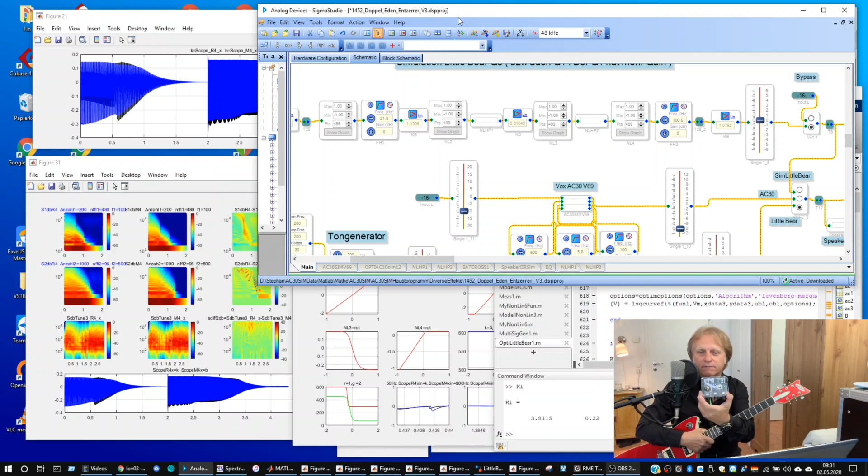This video blog is about a very new thing I've found here. This is this little box, a stomp box with a tube inside. It's called the Little Bear, and it sounds like that.

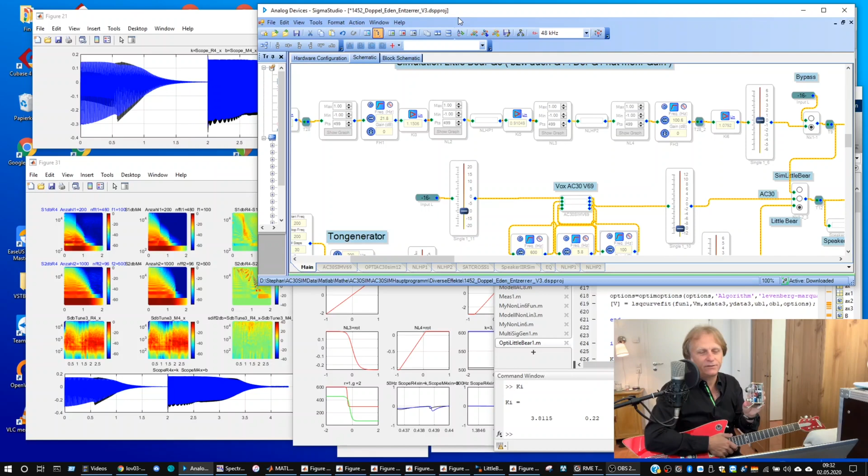My friend Joe gave me this and said, Steve, have a look at this nice little stomp box. It's got a real tube, the 12AX7 inside, and it's got some tone pots here for tone blend, gain and volume. I played that and I think it's pretty great, a dirty sounding little tube thing.

I'd like to model this in my digital DSP platform, the ADAU1452 from Analog Devices, and that was a great challenge for me to do.

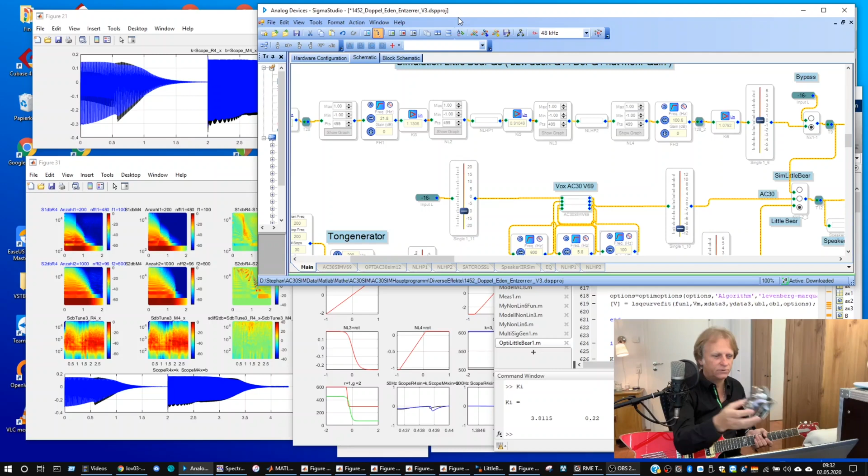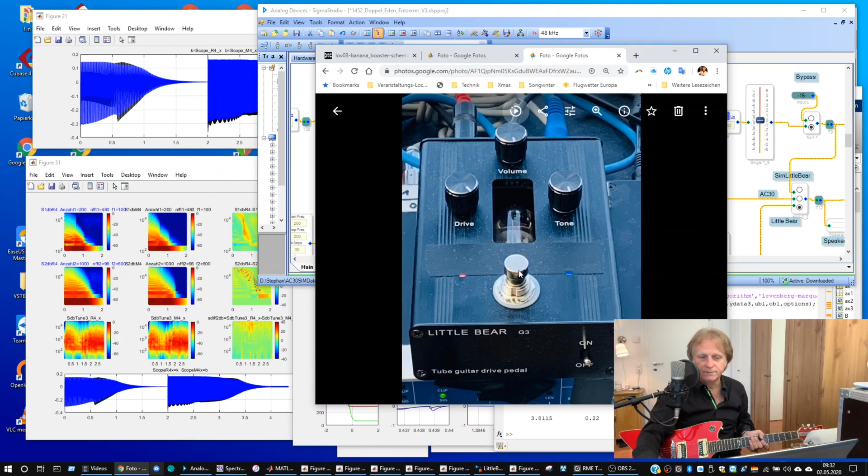I thought, well, this is a little bit humming because of the plexiglass - it's not very much shielding. So I found a device from China, this one here, Little Bear G3. It's actually the same circuit, but it's got an aluminium cabinet outside, so it's good against hum, same pots and the same tube. It's got a little less drive than the original G1, but that's okay - that was already too much.

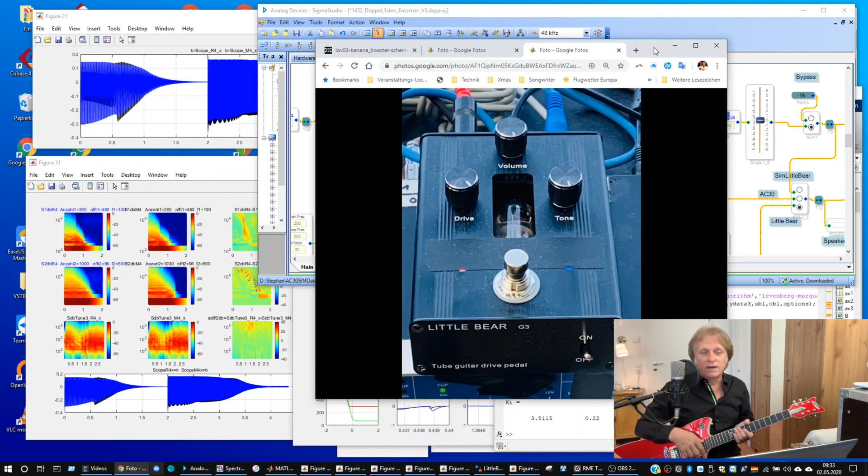I tried to contact the company to give me the schematic to have a look at it, but they didn't give me. So I had a look at the signal. Actually, I can show you the signal here, and it's pretty fuzzy. You see the edges at the negative signal side - that would just give this little fuzzy sound, a nice dirty thing.

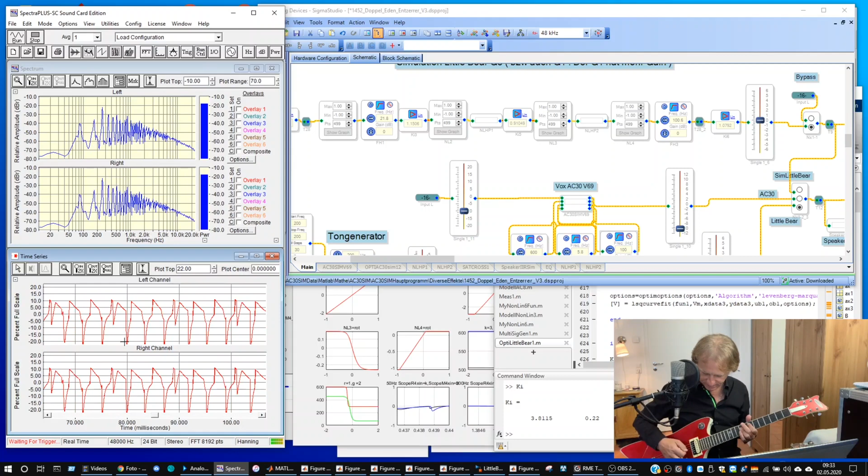It's pretty different to my AC30 simulation, which I loved all the years - a completely different sound. I can show you here. I have a simulation of my Vox AC30, and it's like that - totally different, much smoother. You see, the signal is rounded and limited on both directions, positive and negative, and that gives a very creamy sound.

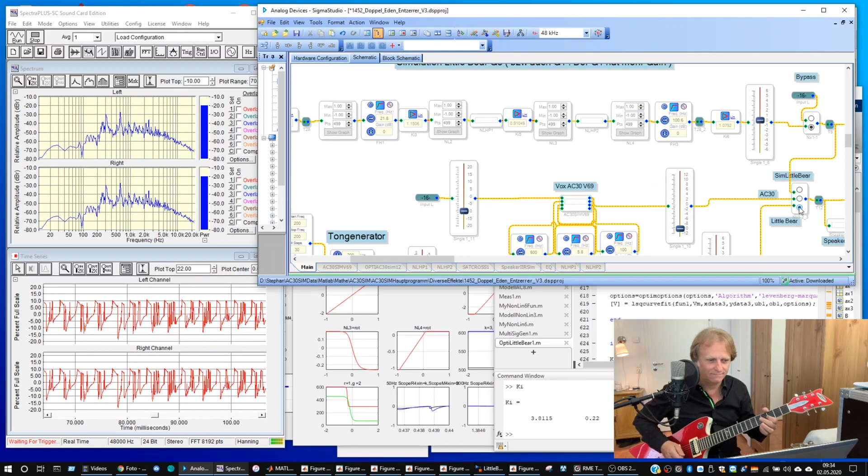Right? Creamy, soft, not too much treble, but this little beast has a little fuzziness, which is so nice. It's actually live played through the Little Bear here, physically connected to my audio unit.

I thought, what's inside? What can be there? There's this tube, the 12AX7. This usually has two stages to reach the gain. They are both connected, and there may be some high pass between input and output somewhere in between. Don't know really, but I looked at the internet and searched for some other schematics of similar stomp boxes with tubes inside.

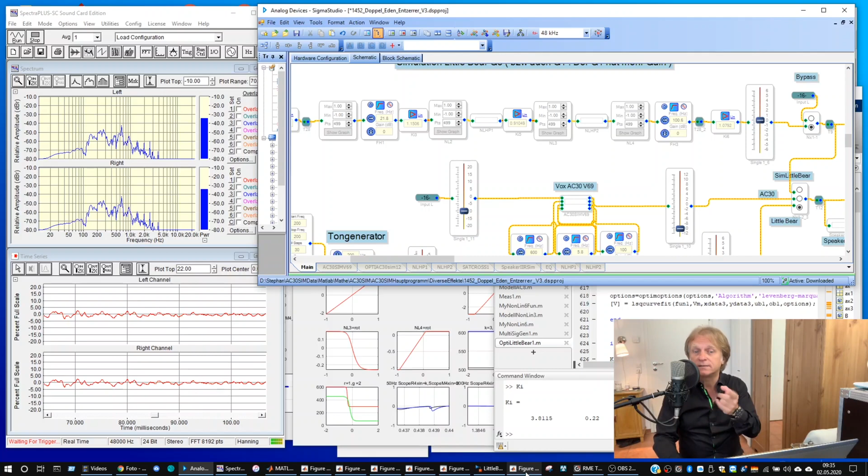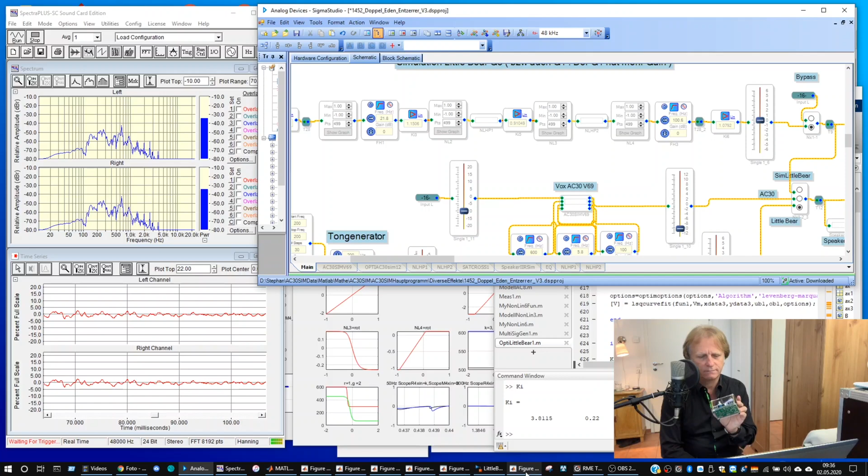Actually, it's supplied with a 9-volt DC power supply, and I thought, well, maybe they have a voltage upward regulator to reach the high voltage of 140 to 200 volts at the tube to let it work in the normal condition, but I wasn't sure. I couldn't look at this circuit so much - the printed circuit boards are very hard to determine what's inside. I couldn't see any integrated circuit there, so I thought, well, what's there?

So I was wondering why the signal is so edgy, and after researching the internet, I found a circuit here, which is a boost driving pedal with a 12AU7, which is a bit different, but similar. You see here the two stages - stage 1, stage 2, and input resistor and the resistors here. And you see this is connected to a battery, 9 volt. This is very unusual for a tube to drive.

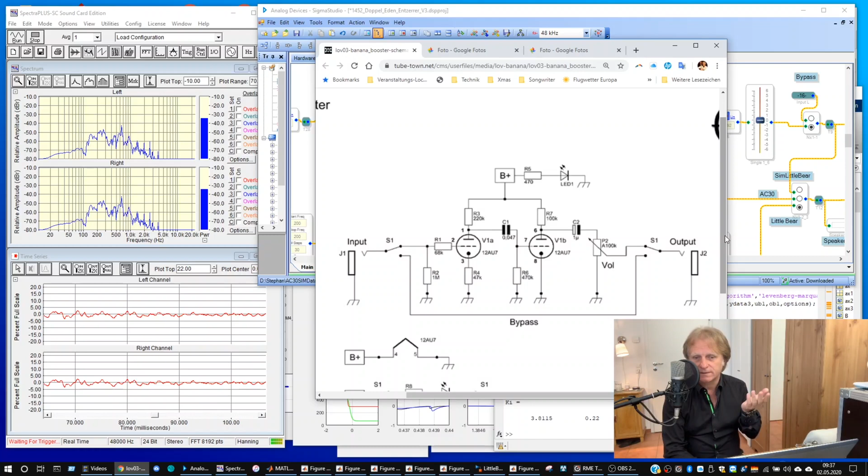And then I said to myself, well, let's start a little SPICE simulation and look how the signal and voltages are. I could see clearly that the bias point is very high, close to the 9 volts, about 7 or 8 volts. And then you see this clipping very soon at the positive side, and it's got a long way down to the negative side. You can see it in this signal here - that it's the truth.

I can show you a bit more close. This is a sine wave. See this? This is the Little Bear, and you see there's a long way down on this negative signal. If you compare it to the AC30, it's like that. You see, it's quite - there is some asymmetry inside there, but more or less symmetrical, more or less, okay?

If it's strictly symmetrical, you wouldn't have the odd and even harmonics - you would only have this and this and this and this. But you can see the Little Bear has lots of harmonics here, lots of harmonics. That's why it sounds so fuzzy. I love it. Okay, stop it here.

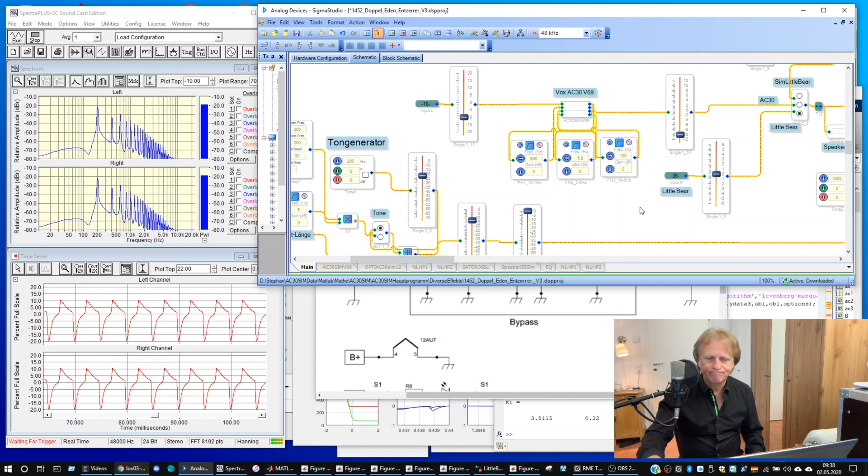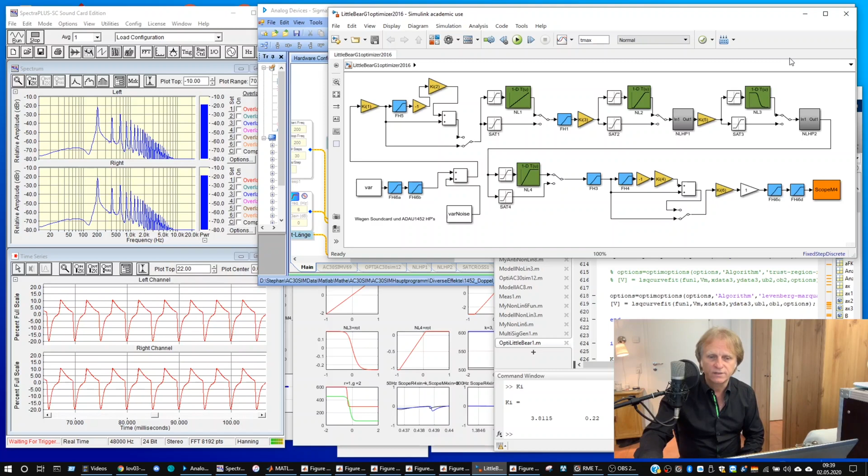That was a good starting point for me to go to Matlab, and I built up a Simulink model. So assuming that we have nonlinearities there, it's hard to decide how many, but usually 4 is enough to give the algorithm, which is the lsqcurvefit here in Matlab, which enables us to solve nonlinear curve fitting problems in a least squares sense. You have the possibility to open this help function here in Matlab.

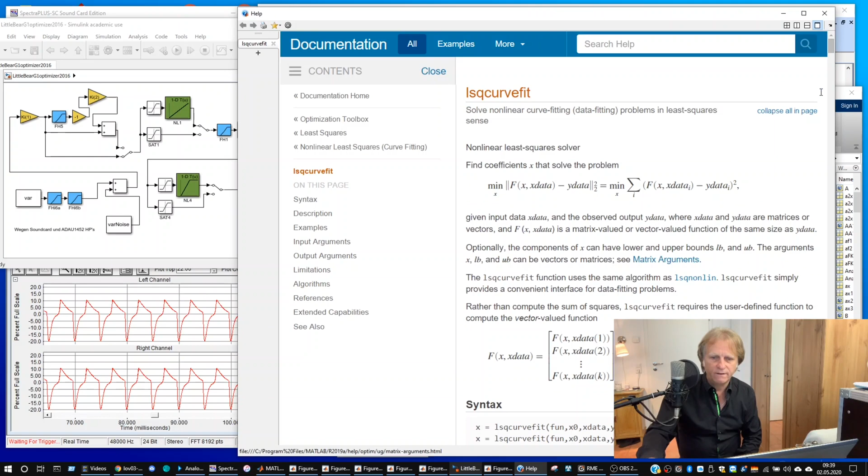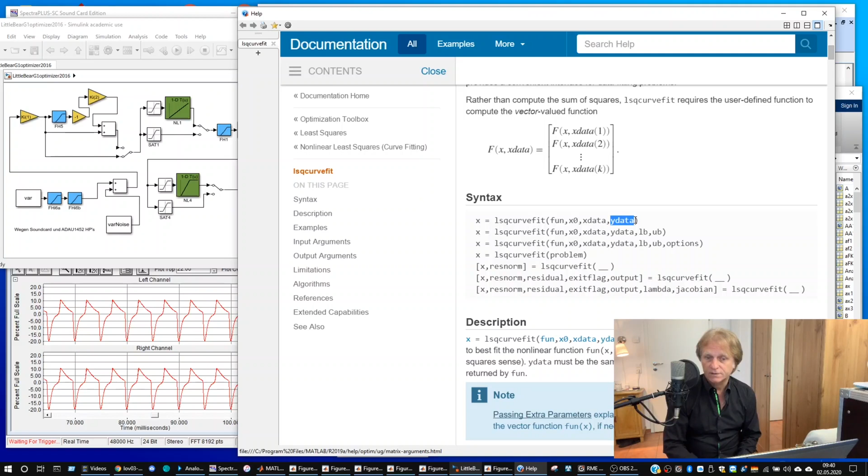This needs at first X data. X data is any signal. It could be sine waves, pulses, noise, or even guitar tunes. And the Y data here is the measured signal coming from the pedal. So the distorted reference, the target, we would say.

And you need the function, which is then the actual model, which I assumed here, with some blocks like high passes inside here and there. This I don't use; this was for the tone blend, so I'm putting that aside. So we have 4 nonlinearities. We have some nonlinear high passes, some linear high passes here, and some linear factors, ky, ki, 1, 3, 5, and 6.

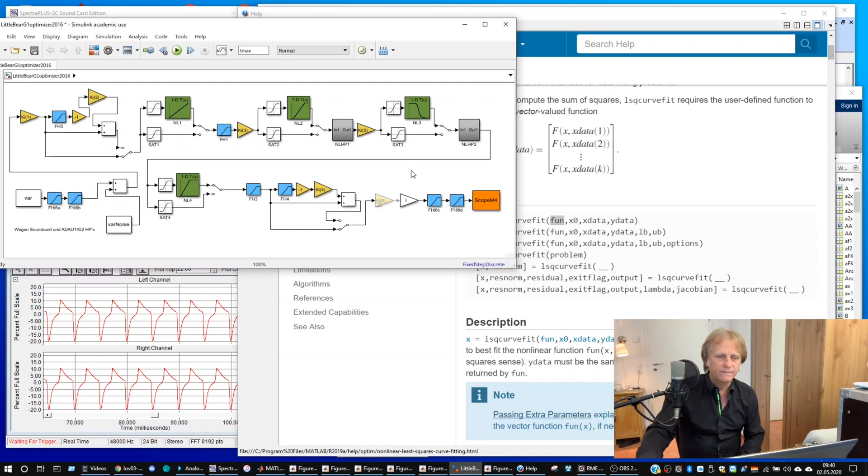And to let this run, we need this function inside Matlab defined. The function is here, the model. It's a model function, and that describes mathematically what's here in Simulink. Simulink is a bit easier to understand for me because it's a visualization of the model, and the actual function here is fast to calculate in the LSQ curve fit.

So we have nonlinearities defined with exponential or with tangent hyperbolicus functions, and we have constant factors here for gaining. We have high passes, nonlinear high pass functions, and linear high pass functions. That's here.

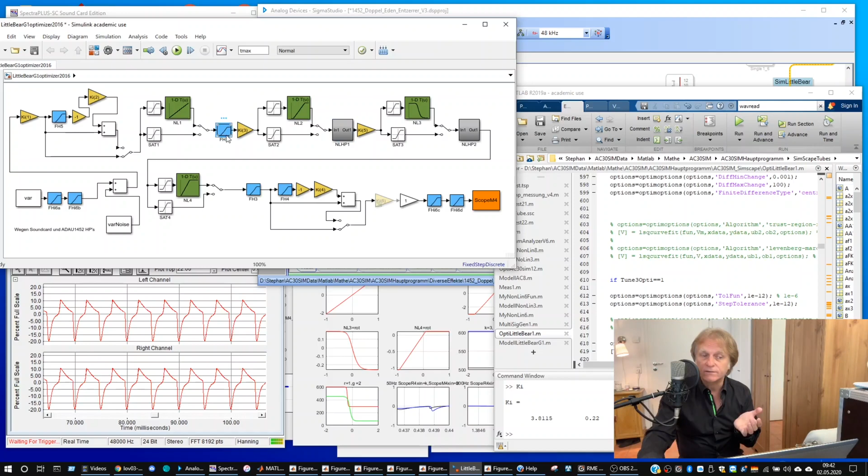And the LSQ curve fit works so that it toggles or tries all the parameters I'm giving it, like the k factors and the nonlinearity and the nonlinear high pass function and corner frequency of the high passes, and then it puts out the result. I use the guitar signal actually to let it optimize the parameters.

And you see here there's a little tune. It's 3 seconds long from the guitar, and the black is the actual device under test, the Little Bear physically, and the blue one is the result of the model with the fitted parameters. And you see it's very close every time, here and there.

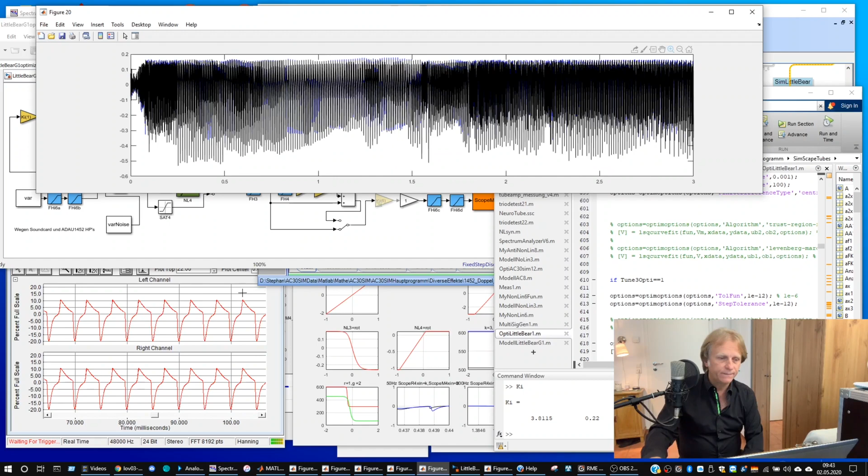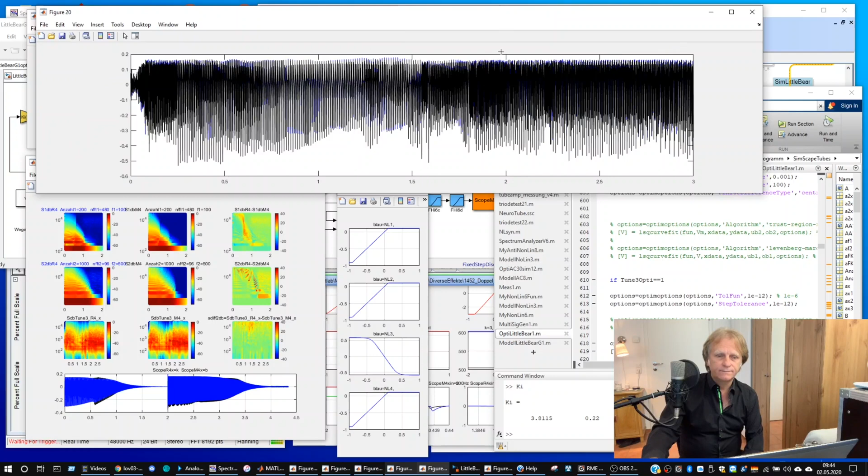And this is a guitar tune, the reference target, the physical model. And this is the simulated model and the difference. What I want to say, I implemented this on the DSP. There's the DSP model in SigmaStudio. So we have all the blocks here, like k factors.

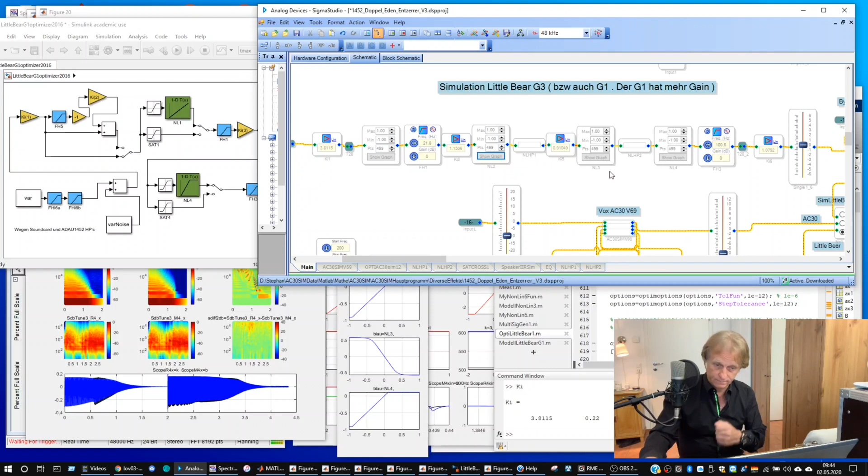We have the nonlinearity, which looks quite linear. Here, hard clipping, asymmetrical, and the NL3, which is soft clipping, and the NL4 is again very hard and very asymmetrical clipping. As I told you, the signal we find here is typical for this unit, because of the 9 volts the tube clips very asymmetrically, so very little positive range and long linear range, and altogether it's resulting in this function here.

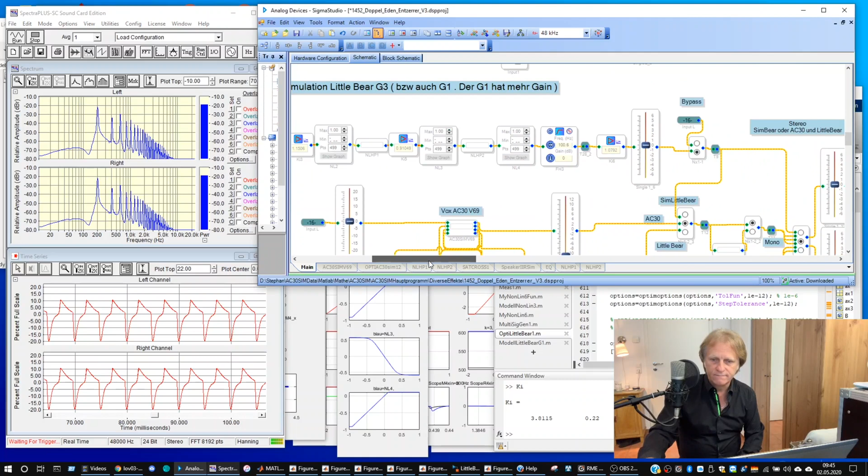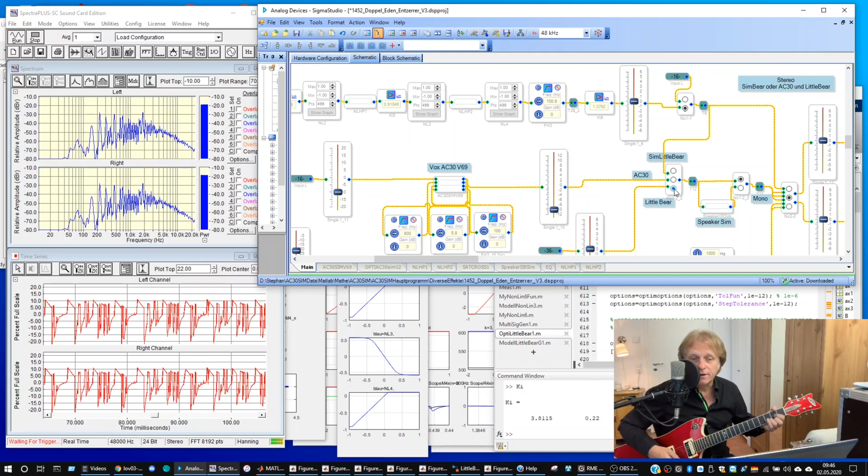And yeah, let's have a listen to the model, and if it fits right. So we have again the guitar. This is the real Little Bear, and then we have the simulation of the Little Bear. Little Bear again. Very close, right? And then again to the AC30. Totally different. And the Little Bear.

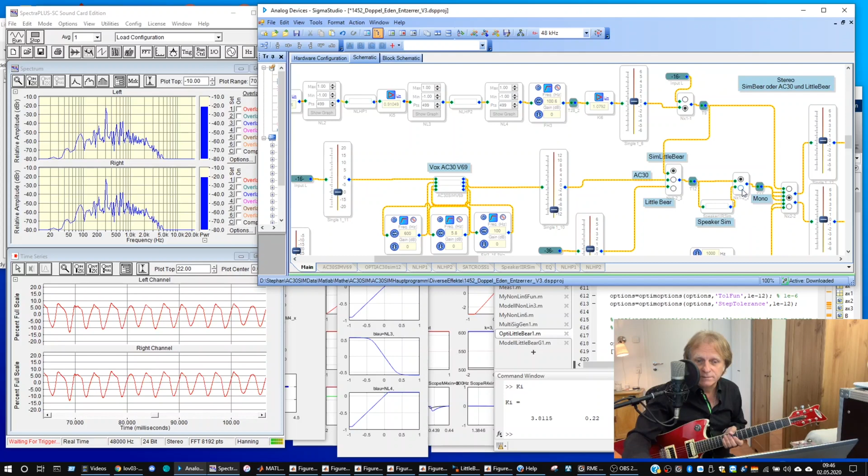Well, listen to this. This is without speaker simulation. Now we put the speaker simulation in. Much nicer, more like a real amp. AC30. Little Bear. AC30. Simulation Little Bear.